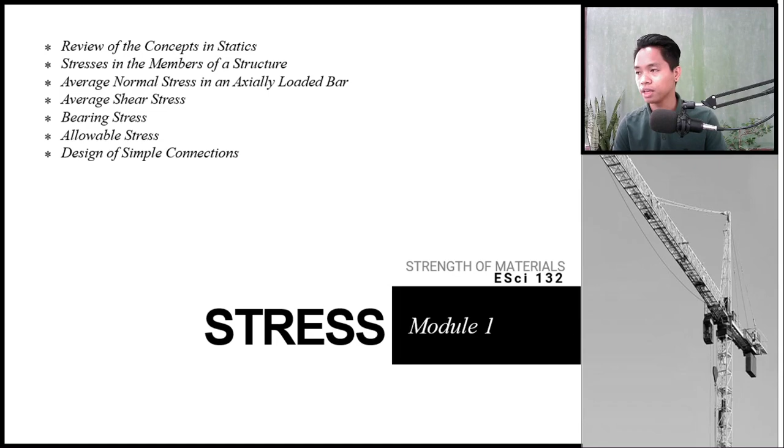We are going to first review some of the important principles of statics and show how they are used to determine the internal resultant loadings in a body, which is very essential, the topic on internal forces in statics, because we are going to analyze internal forces for stress.

And second, we are going to understand the concept of normal and shear stress. So it's just normal and shear stress for this module until Module 4. Yeah, until Module 4, it's just normal and shear stress as the basis.

And then we will analyze and design - we are going to start analysis and design of members that are subjected to both axial load or direct shear, depending on the case. So we will start with our knowledge in statics, then the additional work will be on stress. So, are you ready to start with stress?

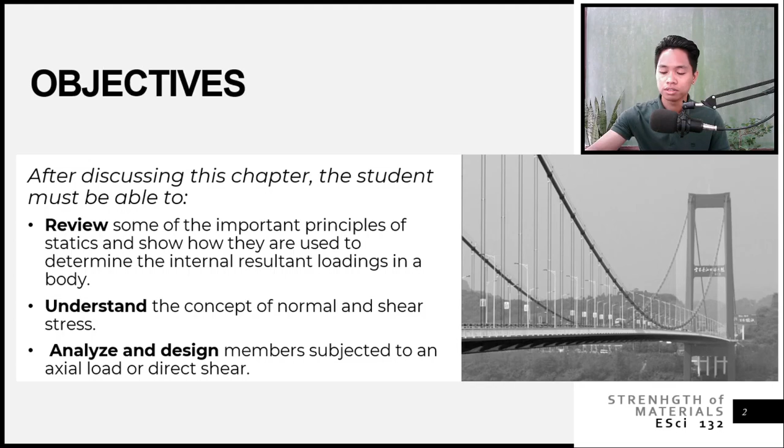Alright, so first we are going to review the concept in statics. First, we are going to start with external loads. We know that we have external loads that happen on a member. So we have a surface force. When we say surface force, that is a distributed force - when do we call it a distributed force?

We can have a distributed force, and also we can have a concentrated force. So, depende - we have distributed force and we have concentrated force.

Again, as of this point, since we're in mechanics of rigid or undeformable bodies, you are assumed to have gained the knowledge or skill in solving the resultant forces of a distributed loading, so you can simplify a distributed loading into a concentrated force.

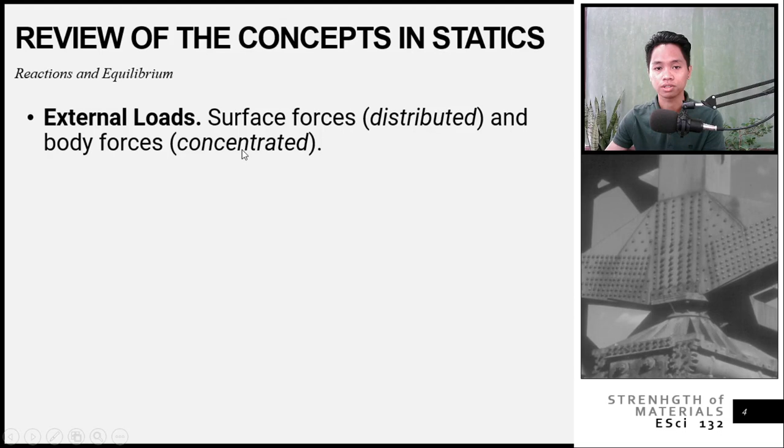So the second important topic is, of course, the support reactions. As some of you experienced in statics last year, if we didn't get to discuss support reactions, you need to review that, because support reactions is a very important process - it would be the first step in every problem. You can't solve for internal force if you don't have a reaction, so you start with support reactions.

So the general rule: if your support prevents translation, then there should be a force reaction there. For example, if you have a pin support - I mean roller, right? So wait, if you have a roller support, for example...

okay. So, nag-install pa ko sa pen. Nag-loading.

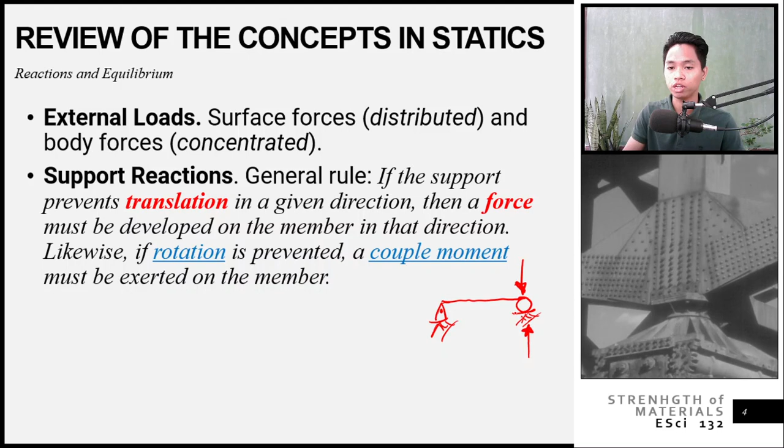Now, this roller support prevents the beam from moving upward or downward. It can still move sideways, right? It can move sideways, so it can translate, because it's a roller. Therefore, since it doesn't prevent translation about X, no force develops there - so we have no horizontal reaction for roller.

But it prevents translation about the vertical axis - meaning it can't move up or down. So since it prevents translation about the vertical axis, there's a reaction force there. That's why if you have a roller support, obviously there's a vertical reaction there.

Same with the pin. Since it's a pin, it can't move up, down, left, or right. So therefore, it prevents translation about both the X and Y axis, or vertical and horizontal axis. Now, if it prevents translation in both axes, that's why we have two reactions when the support is a pin.

Now, if rotation is prevented - for example, if we have a fixed support - but if it's a pin, the beam can still rotate there, right? It can still rotate because a pin is good for that. So therefore, it doesn't prevent moment, so there's no rotation reaction there - no moment reaction.

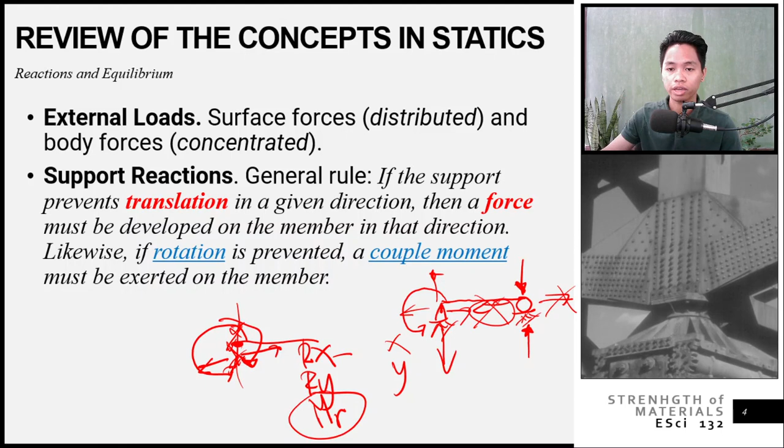Alright, so I hope that's clear. Just to review, for everyone who missed it or forgot, these are our reactions. For a cable, it's always pointing away from the member - it's tension, tension. For a roller, we have one unknown, F, right?

A smooth support is always perpendicular to the surface. For an external pin support, we have two unknowns.

If it's a pin support, we have the vertical reaction, Fy, and the horizontal reaction, Fx. The same applies for internal pin supports — basically a pin has two unknowns because it will not translate about the x and y axis.

For the fixed support, of course, we have three unknowns: Fx, Fy, and M. I hope that's clear.

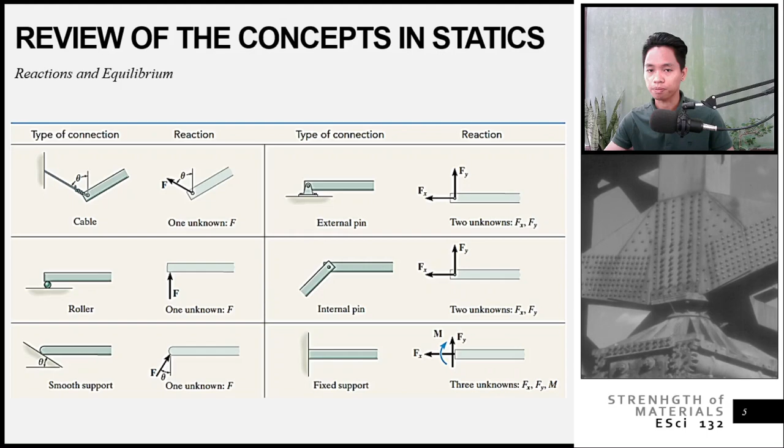After that is, of course, the equations of equilibrium — that's the second step. After getting the reactions, in mechanics, the next step is to use the equations of equilibrium, because we are always in equilibrium, since we'll be talking about stability. Your structure must be stable, so if it is stable, all your summation of forces should be equal to 0.

So Fy, Fx, and if in 3D, Fz — their summation should all be equal to 0. Remember that. The same goes for moments: if it's in equilibrium, the summation of moments should also be 0. Please remember that.

This was already discussed in statics, so you just have to review or remember it again.

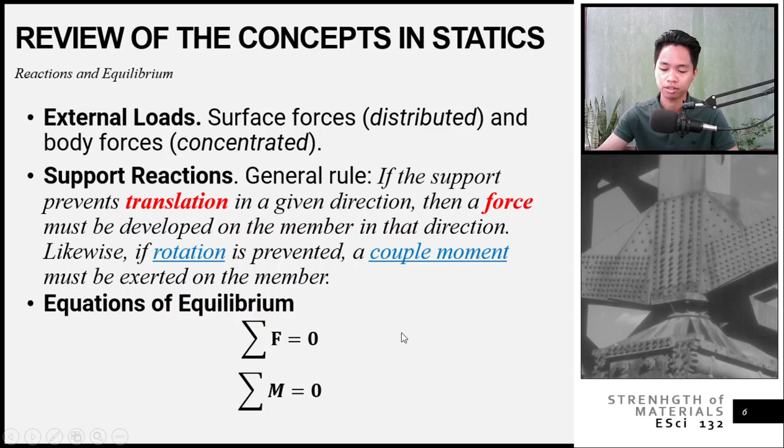Then we are going to have the internal resultant loading — this is one of the highlights of the module and the course, because we are going to analyze the member internally: its deformation and its internal forces, since these determine whether our material will fail or not.

It determines if the material can resist the applied load. As discussed last semester in statics of rigid bodies, we have four internal loadings: two forces and two moments.

We have the normal force, acting perpendicular to the area, and the shear force, which acts parallel to the area. For the moment, we have the bending moment, or flexure, caused by external loads that tend to bend the body about an axis. Lastly, we have the torsional moment, also called torque.

We have another module that discusses torsion in detail. This effect develops when the internal load tends to twist the member.

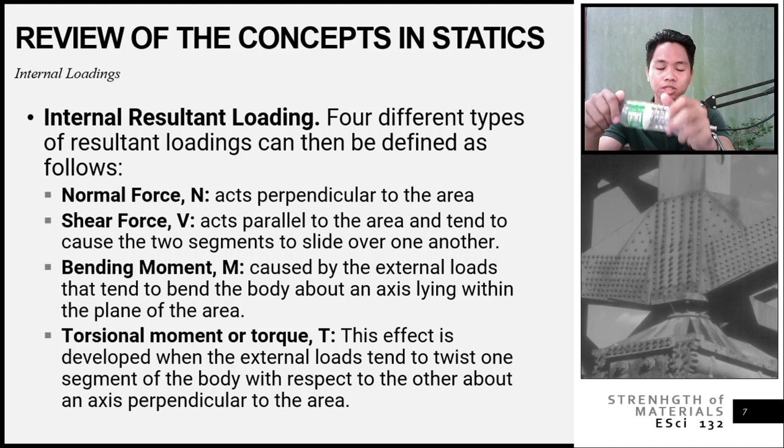For the bending moment, it's like bending the member — it can become a smile shape or a sad shape. The torsional moment is a twisting moment, meaning, unlike bending which makes it smile or sad, torsion twists it — like a shakoy (twisted pastry), it gets twisted because of torque or torsional moment.

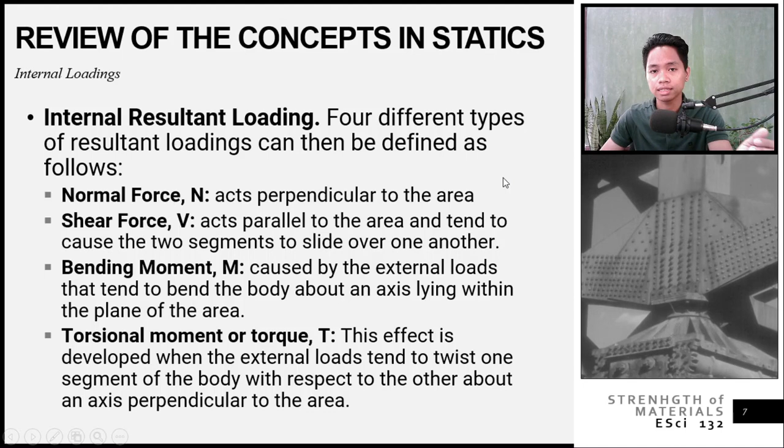So those are the internal loadings that may arise if you cut a section along a member. Now, other important points.

The mechanics of materials is the study of the relationship between external loads applied to a body and the stress and strain caused by the internal loads within that body. In simpler terms, as I mentioned before, statics determines the force.

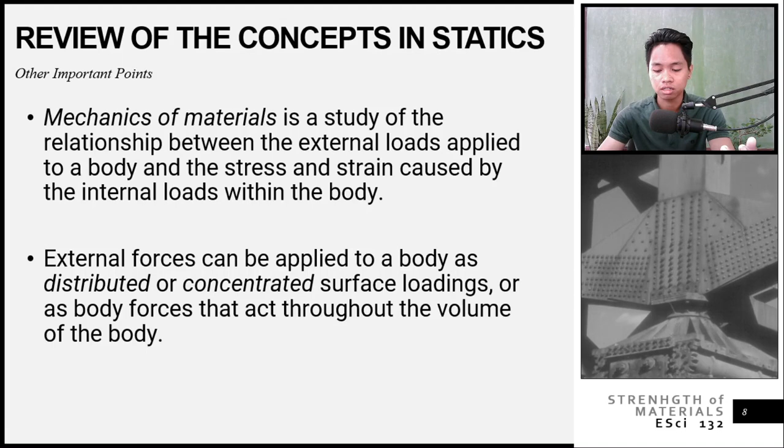You are going to determine the force acting on that member or on that structure. Si mechanics of material is siya ang mo determine if kaya i-support sa load. I mean, if kaya i-support sa structure ang load. Alright? I hope mo nakagets. That's clear. So, external forces can be applied to a body, as mentioned ganina, as distributed, or it can be concentrated. So, depende rin na ninyo.

So, linear distributed loadings, kabalo na ta nga if you have a distributed loading, we are going to express that as a resultant force. So, unsa man ang resultant force of a distributed loading? That would just be the area under the load diagram. So, therefore, we are going to get the area para makuha nato ang resultant force. Now, for the location of the resultant force, kabalo na mo, that is just the centroid of the area.

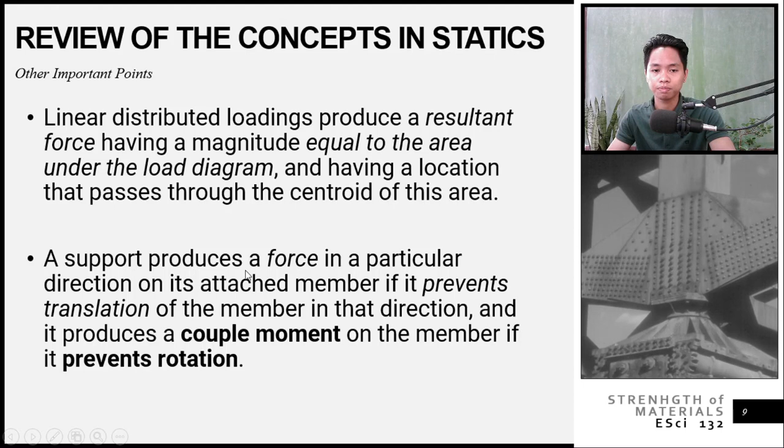Okay? Then, a support produces a force. So, if it prevents translation, force na siya. Now, if it prevents rotation, we will be having a moment reaction on that point or on that support. Then, for coplanar loadings, coplanar meaning two-dimensional. Right? So, here in our strength of materials, wrong spelling diay siya. So here in strength of materials, we are going to have two forces and one moment. So that is your normal force, your shear force, and your bending moment.

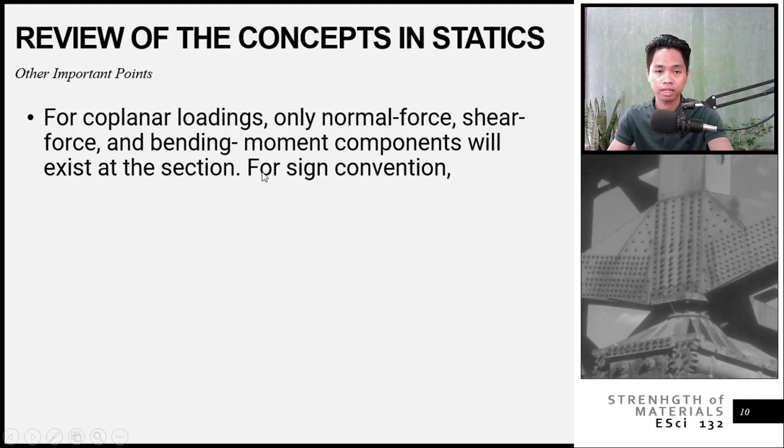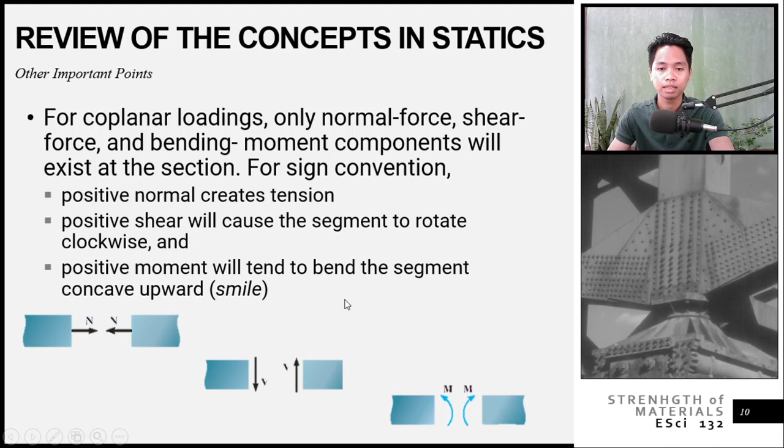Now let's review again. Since review man siya, the sign convention for normal force: the positive normal force creates tension. So always tension, kabalo na mo ana. Now, for the positive shear, it will cause the segment to rotate clockwise. So, dapat clockwise ang movement sa shear. Then, for positive moment, it will tend to bend the segment concave upward, or smile.

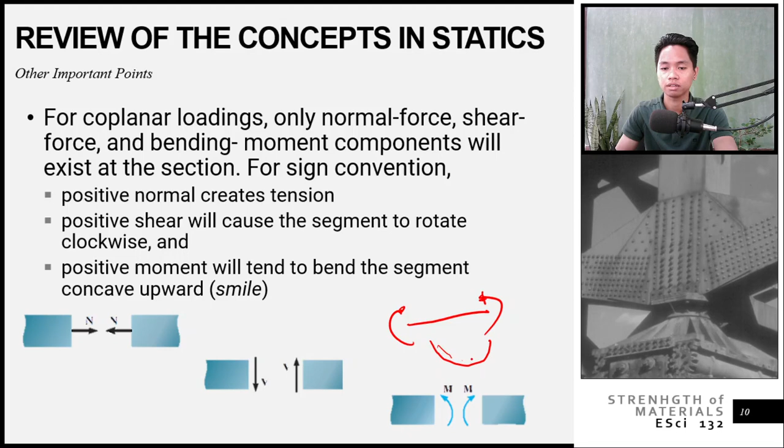So, if we have a beam here, and if we have a moment here, these moments are positive moments, because it will make the beam smile. Alright? Mabend man siya ing-ana. Alright? So, smile siya. Okay. So, I will not discuss this anymore.

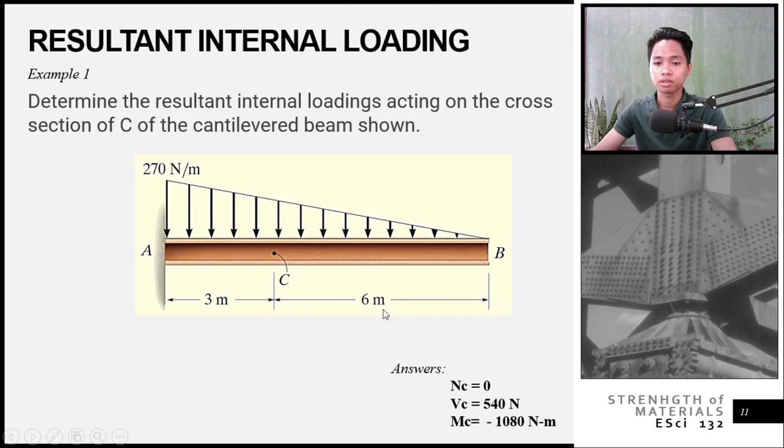Alright? This is example 1. This would serve as your practice problem. So, I have here the answer. You review your learnings in internal forces or resultant internal loadings to arrive with this answer. Okay, so this would just be a review man gud siya, so I don't have to discuss this anymore. So please do review the concept of internal loading. Determine the resultant internal loading at C, and this would be the answer. Same here, right? Determine the resultant internal loadings acting on the cross section at C.

Okay, murag medyo naguba ang PowerPoint. Let me just edit this for a little while.

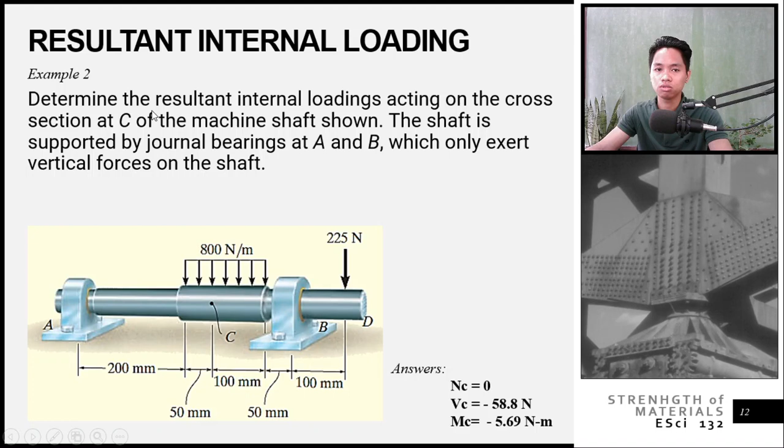Okay, so that is our example number 2. So again, I don't have to discuss this anymore since this would be a review. But anyway, I'll put the answer for this problem. So again, example 1 and 2 would serve as your practice problems. So sir, unsa man na? So I will just be

Okay, so prepare for your coursework number 1 on Monday, right? That will be open from Monday 12 noon until Tuesday 6 a.m. So that would be 18 hours. Then the coverage would be internal loading and forces on coplanar systems. So again, it's like a quiz pero di ni siya quiz, alright? Lahi siya sa quiz pero it will be recorded under the quizzes, right? So for your coursework 1, it will be about internal loading and forces on coplanar systems.

So two-dimensional lang. Now, if ever nga gusto mo mag-review, naa ang mga videos sa ubos. Alright, naa ang mga importante nga videos that we are going to apply for this coursework. You are going to review free body diagrams, how to solve reactions at supports, and then how to solve internal loadings, preparation for the ESci 132 course.